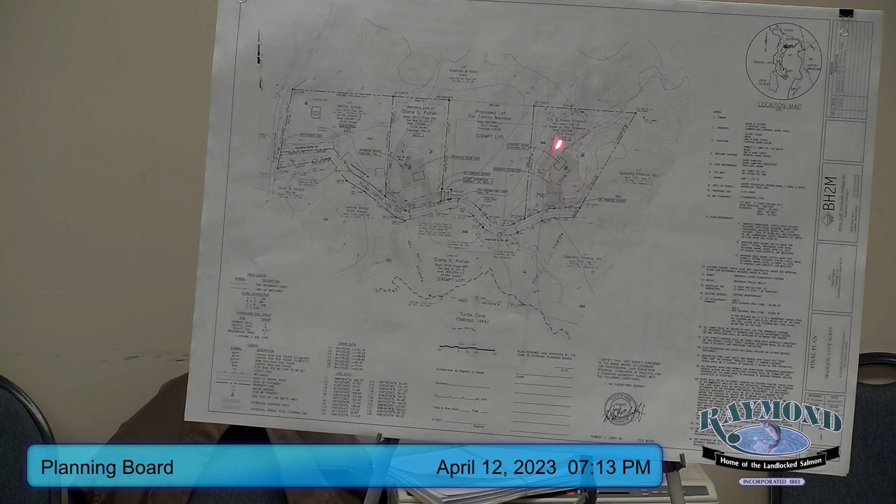Wetlands - we have wetlands mapped, and the vernal pool season, as Jim said, is coming up soon. We'll be proposing a vernal pool study for the two lots, and that'll be shown on the plan. What we've done with agreement of the town and planning board, on lot 2 there's a potential stream - any of these wetlands that are flow-through would not support a vernal pool. So we have one up here in the corner, and we asked the planning board if we could show a development concept as if this turns out to be a significant vernal pool.

So I have a 100-foot setback, which is required, with no disturbance, and then a 250-foot setback where you can disturb, I think it's 25%. I've shown those, though I didn't label the two lines - Jim said it would be nice if that told everybody what it was. The shaded areas represent what would be allowed for a building window, with 15% disturbance. For lot 1, I've outlined a potential building window and driveway location for these two lots, representing the maximum area that could be disturbed.

The only question we still have - that'll be available soon - is if this gets approved, we will assume the worst case, that it's a significant vernal pool, and our development will follow the Army Corps and DEP rules. But if it turns out there's no significant vernal pool, then the restrictions, other than the 100-foot setback, would go away. So we still have a 100-foot setback because it is a vernal pool, but the significant part would go away.

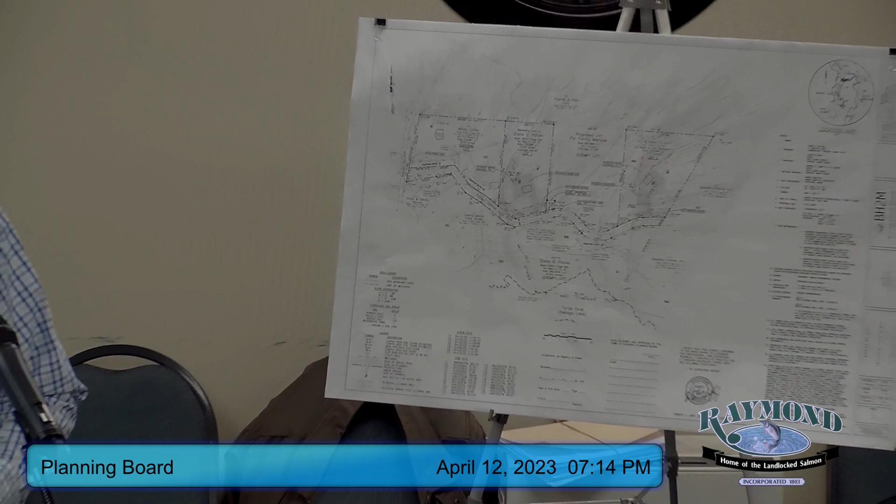We talked about streams - there were no streams on this parcel. 15%, we've got that spelled out. We have a phosphorus request and involvement with how to manage that. We're proposing a drip edge treatment around each house, which with our detail needs to be upgraded to have a liner in it, so Plan Note 25 talks about that. And on the 15% disturbance, Note 17 describes for Lot 1 and 2 that language, and of course the outline on the plan.

The phosphorus issue is a little unique here. We have an existing road, built and approved by DEP, handling all the stormwater issues, but we don't know what anyone's going to build - they're going to build a house and a driveway. So as far as trying to come up with an exact phosphorus calculation, we made a judgment of where they would build the driveways. In addition to the drip edge, we're proposing buffers - a stormwater buffer here and along the front - as a methodology to mitigate and minimize runoff from these lots. They're a little tough, you know, there's a lot of elevation out there, and we tried to work with the grades as water leaves a driveway or a house.

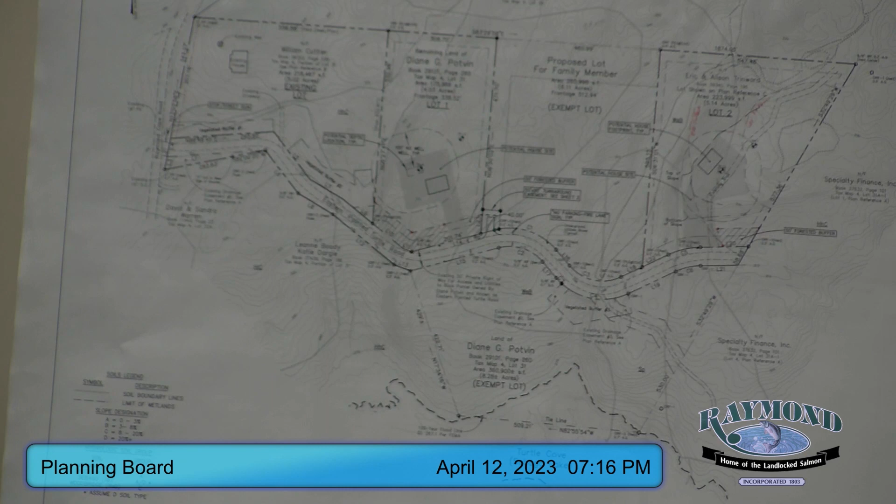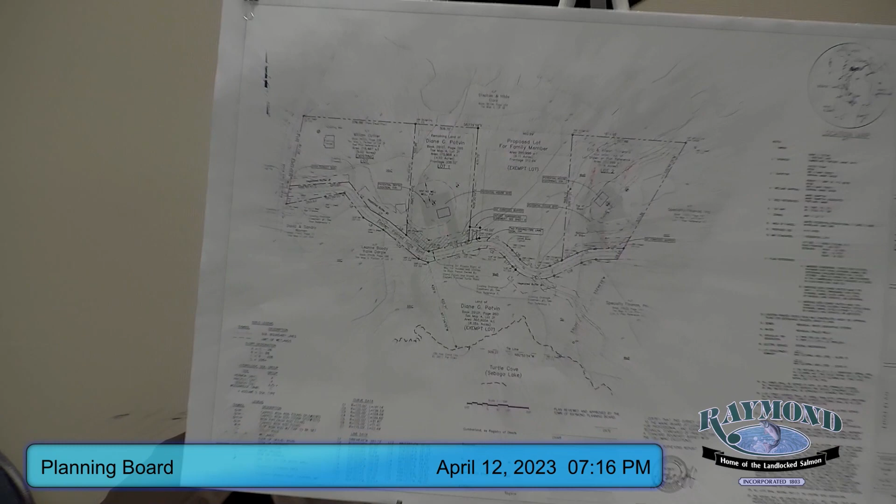That in conjunction with the limitation for clearing, right? Correct, yep. So those are notes 17 and 25 on the plan. Jim made a reference to a vegetative buffer. Number 3 is channelized, that's an existing buffer the DEP approved. That's all along Eastern, so I wasn't planning on touching it. It met their requirements, and as far as I know it's working really well.

So again, we talked about the buffers, the drip edge, proposed pins on the buffers. Yes, we will set them, but until they're established and approved by the planning board, I didn't want to pin the wrong thing. So there are smaller diameter pins for buffers, and they have a cap on them that says no disturb buffer zone. And we'll set those at separation distance around all of those buffers, assuming they get approved.

On the summary of planning board action in Jim's memo, Plan Note 24 about the road association, we should add that, or maybe add another note that all roads in this subdivision shall remain private, to be maintained by the developer, on and on and on. That's pretty standard language, and it applies now because it's an existing road served by others, and that should be extended to this plan here.

Okay, the lotting plan, I guess we could talk about that. There was a note on the final plan. Well, again, the road, private road meets the up to 10 lots sunset provision, Jim talks about when a project's approved, just to finish, so that note can be...

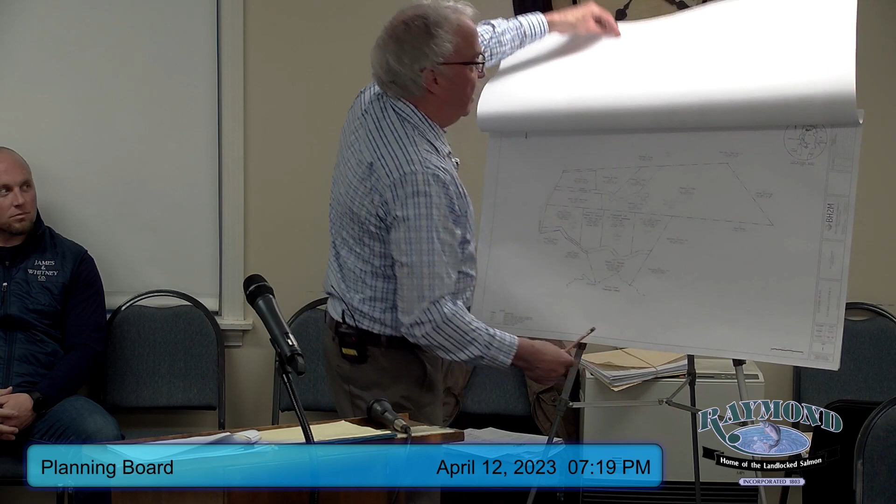That'd be great, okay, let me flip open the lotting plan. We can have a little discussion to see if we can get to a point of agreement. Here's the Potvin subdivision down on the bottom, showing the proposed lots and the lots that are going to be. Here's Turtle Cove here. Steve Clark subdivision up here, showing the division, and then the other one, I get his name wrong, it's Chase.

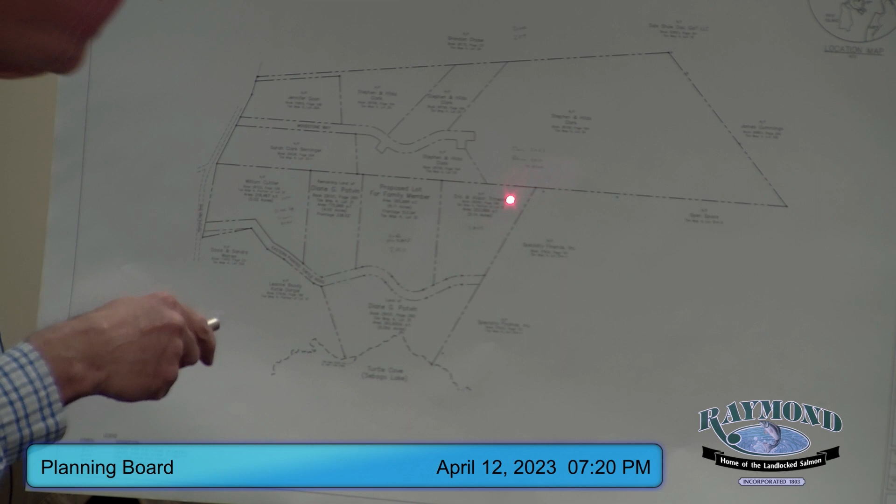Okay, there's a 37-acre lot up here that we didn't survey. There is a survey, and I believe that was done with Diane Potvin in 2014. This lot here, I gotta move up so I can read some of my notes here. Steve Clark, well, Diane Potvin, 41 acres, bought this in 2011. So if this is a lot, this is a lot, and this is a lot, this lot being over 40 acres is exempt from subdivision.

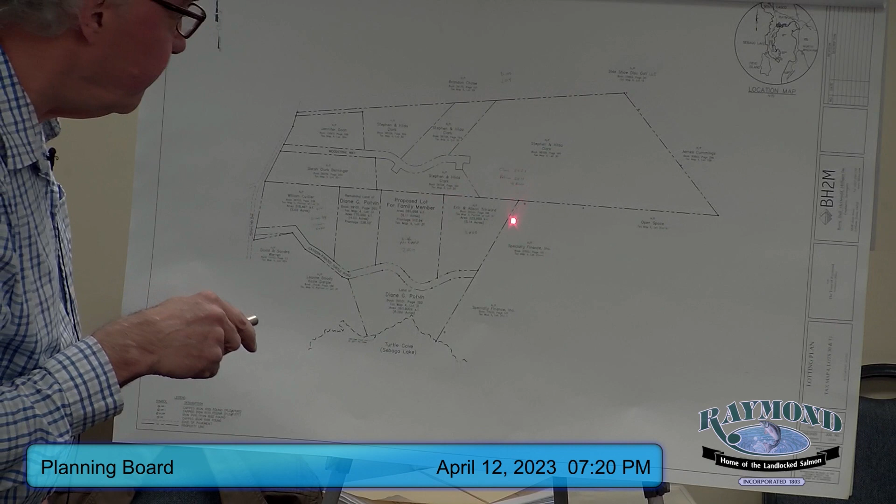So when this was divided, Chase being up here, this lot here, Diane Potvin bought it in 2011 and sold it to Steve Clark in 2021. And then this is Steve's proposal, so we show all the lots there. Nothing's happening on this lot, as far as I know. We have not done any survey on it, but it is identified as lot 29, lot 30, and lot 31.

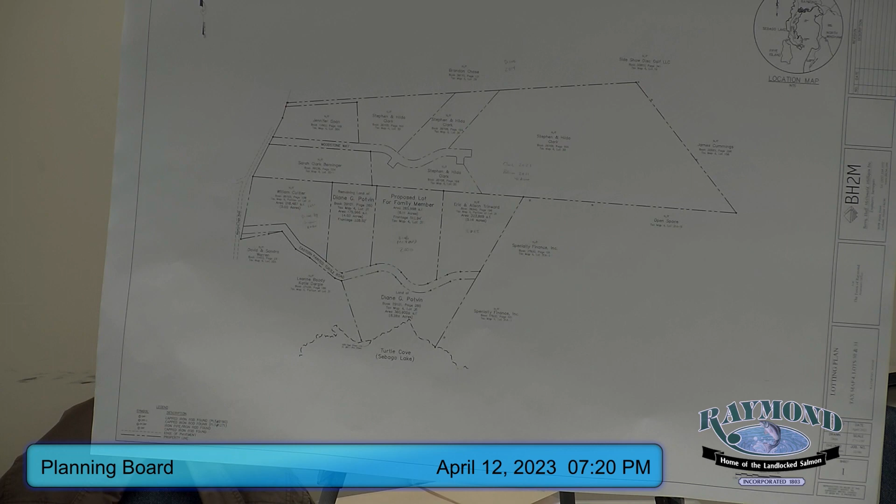So these lots were designated at some point in time in the town records, those lots and tax map numbers. Diane Potvin, and I believe at that time she and her husband bought this piece of land, and then she acquired full access and title to it by a divorce decree in 2020. And I guess she bought it in 2000, that's she and her ex-husband, they bought this in 2000. In 2020 the courts issued an order that she took control of this.

She sold this here in 2021 to Cutler. That is your first division out of this parcel. This was sold to Trinward in 2022, and that's one of our lots that we're trying to get approved out of this subdivision regulation. So that gives us an overall 3 lots, 29, 30, and 31, and what either is existing or what is being proposed, and hopefully that meets all, or will meet all the requirements that were assumed to be missing.

I was certainly confused, so if we could have some conversation on that and see what else is needed to allow this subdivision, and ultimately this one, to move forward. That's about what I have for bringing to the board.

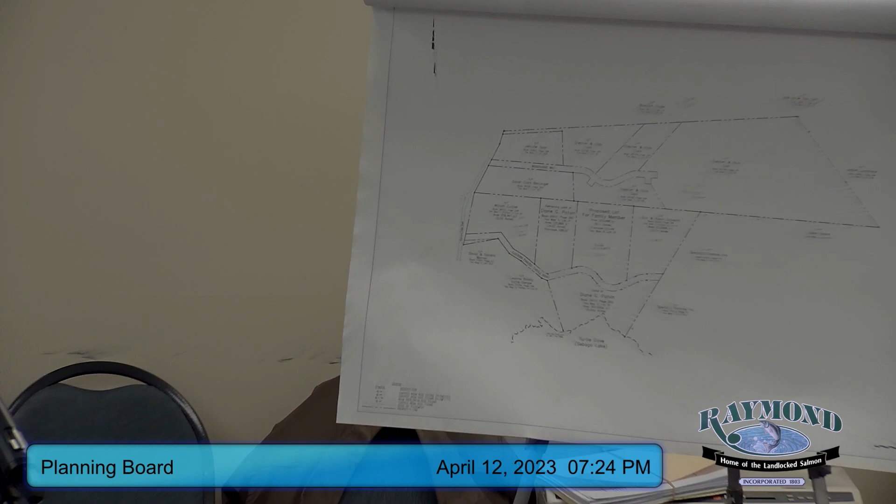Yeah, you'll see that in the Clark subdivision. And I think, Bob, too, that's an area we're starting to get into - you can chime in on it - we won't know until we see Mark Hampton's work, but I think there's a few vernal pools out there that are going to further restrict that as well.

And, you know, one of the rule changes that's coming forth - not that it affects the board, but it will affect many applicants as far as cost goes - is the Army Corps is going to be changing their compensation thresholds. So anything over 5,000 square feet of wetland fill will require compensation, probably starting sometime in May

or June. I haven't heard that yet. Yeah, it's 15,000 now, where they're going to drop it to 5. Wow. That's through the Army Corps, so that's going to have some financial burden on people who want to fill wetlands. So between the vernal pools and the wetlands, I think Bill has a reasonable answer to that question - it's just not going to be feasible to connect.

Okay Jim, how does that work? Is that money that comes back? Yeah, it's money, and right now I think the rate in Cumberland County is almost $6 a square foot. So if you fill 5,000 square feet, you're writing a check to Army Corps for $30,000. And if it's 4,999, it's zero. You go to 5,000, it's 30,000, or thereabouts.

So, was there some discussion - I think I read somewhere - about concern over the family plot, that we needed something special? Yeah, and I think Alex, you can shed some light on that one, because I think that's a discussion you might have had with Jim Kazafikis, if I remember correctly.

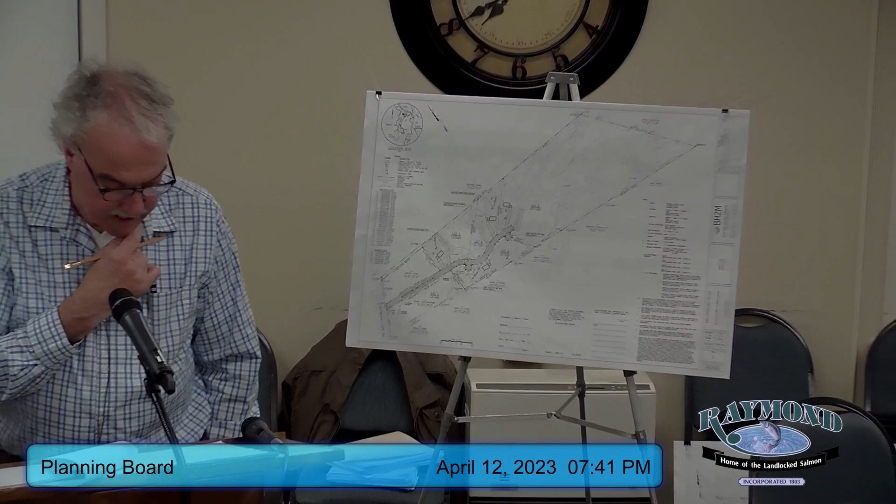Again, Jim's very thorough, got all his permits, his memos. Stephen and Hilda Clark are the applicants looking for preliminary approval of the Woodstone subdivision, so we can move forward with DEP and then come back for final approval. In my response letter back to Alex, March 2nd, I responded to comments, and then like I did on the last one, a summary for planning board action.

Things that we're missing: HHE-200 forms are submitted. Erosion control will be managed on the 5 lots utilizing standard BMPs with erosion control, silt fence, etc. Fire department's response has been accepted. Applicant is preparing a homeowners association and a road association responsibility agreement — those are in the works, and we will certainly have those before the next meeting.

The entire parcel now has a wetland mapping completed. Early on in the process, we had only gone up to a 4-lot subdivision, and then everybody — town and the applicant — said let's see what the whole site has for characteristics. So the entire site has had its topography and wetlands mapped. And that site characteristic would not really allow a road to go any further than what we have proposed.

We do have the turnarounds meeting the fire chief's standards.

Again, the lotting plan came up early on. If we need to go back to that, a plan note shall be added to the final plan outlining the timeline of the expiration: start within 2 years, finish in 4.

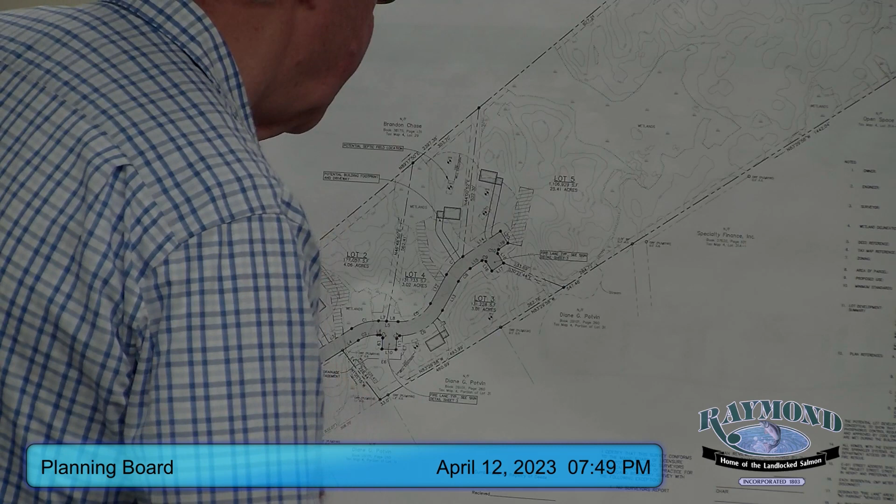Is there a stream here somewhere? There's one, I think, that was discussed that crosses right through Lot 2. I think it's right here, sir. It really starts right on our lot and comes down through here, so there's no impact. I think the stream starts at a designation here, comes down through, so any setback, we can show this little setback corner here, but it doesn't impact anything. It's more on the neighboring property.

Oh, that's right, too. The one on Lot 2 was a wetland. It wasn't a stream, correct? Correct. Yep, we thought it was a wet stream. That's right, yeah, it was not a stream. Okay.

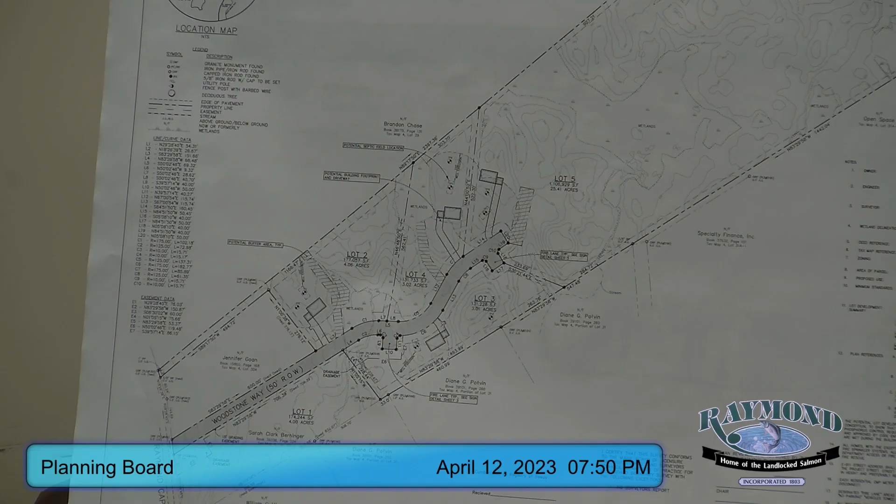And have you looked at this in relationship? I know there's a lot of overlap to the shoreland zoning requirements. Does it seem to be anything that we need to discuss tonight? I think the biggest one was the road slope, but I think most of the items have been addressed. I think all the well exclusion and those types of things come out of that shoreland zoning requirement.

Alex, too, the septic, you'll have to take a look at the septic, right? Because the septic designs require a higher flow rate, daily flow rate, right? Because it's in the shoreland zone, or do we just restrict that? No, that only applies to houses within 200 feet of a Great Pond. 250? Right, it's 200. Yeah, just 200. So you're all set on those, thank you. Okay, yeah, good to know.

And Mr. Chair, this is before you tonight as preliminary. I know they have some items to clean up, but I don't think you're going to see any substantive changes to the plan with any of these items they need to clean up. So again, it's up to the board. I think we would offer that it makes some sense to grant preliminary so they can move forward with their DEP permits, because we don't want to make any wholesale changes to the plan at this point, since it'll impact the DEP permit. And I don't see anything in the road design that's going to change anything.

The 10%, you have a pending consent agreement with the town council, town select board. Alex, what action do they need to do to finalize that? I think at this point, the town attorney was going to reach out to Diane Potvin's attorney to discuss the consent agreement. And I know they've seen it already, but I think the next step would be to make sure that they are good with that. And I'm not sure if it will be signed by Potvin and Clark or how that's going to work, but essentially they need to sign, we need to sign, and then that's good to go.

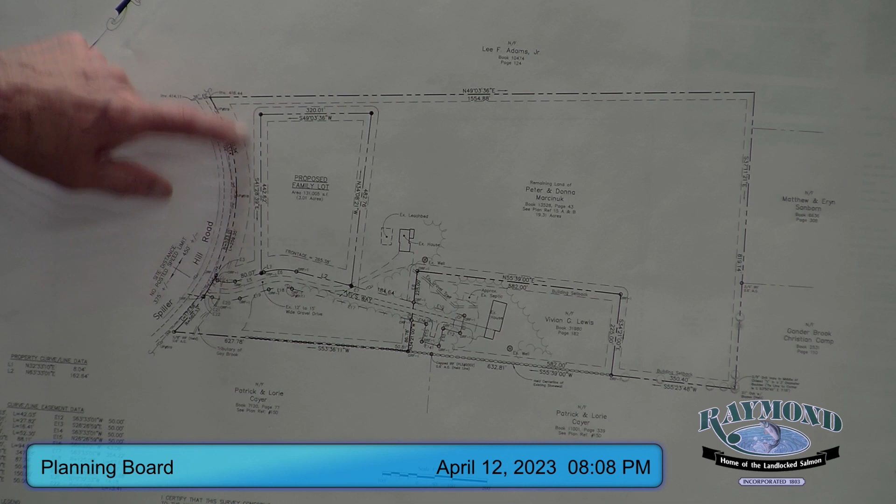Can I ask, with the stream going down that little area between Spiller Hill Road and the proposed lot, would it ever be possible to use that? I'm not even sure that we would be concerned about it, but I'm just wondering if that would ever be used as frontage, or could ever be used for frontage for a back lot, creating kind of a funky lot. Well, they have a back lot now, so Alex, you can help us out here, but I think once you have one back lot on the property, I don't think you can get a second back lot. So I think they've tapped out that option, unless they were to convert this to a higher level private road, then they might have that opportunity.

The other thing would be, if they did that, with a DEP permit, avoidance and minimization might be an issue where you have two crossings on the same property. If this were upgraded to a private road, DEP would prefer that rather than having two crossings. That's a ways down the road, but good question, or maybe never.

Wayne, did you have anything else of concern? Sorry, talking without the mic. Looking at the map, it talked about there's areas of the road that are only 12 feet wide. Is that correct? That's correct, 12 to 15 feet wide is what the existing conditions show.

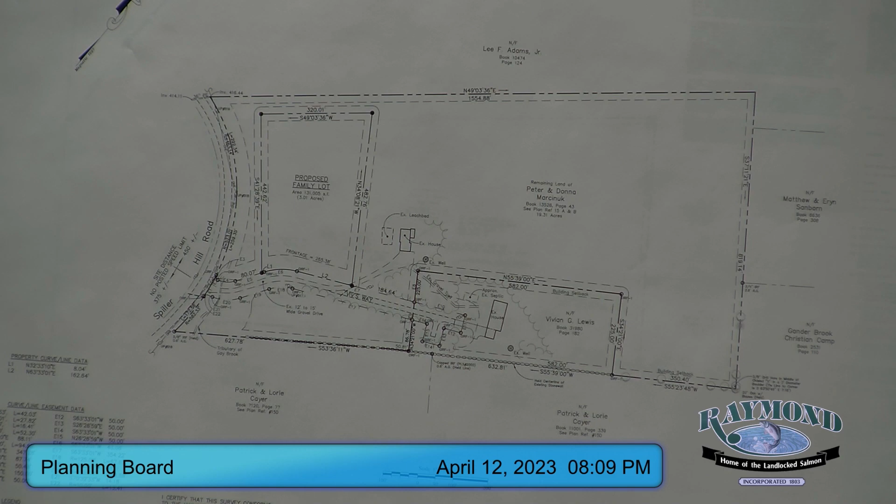Okay, now when we get to 12 feet, that's starting to be a concern. And then the only other thing would be, we've got to take care of E911 addressing, as we know. And for fire protection water supply, at this point it doesn't make sense to have somebody put in a cistern, but in lieu of that, we usually look for a sprinkler system in the house, where it's the new lot that comes in, the subdivision ordinance requires that.

The other thing, and I did have in the memo, the board may want to request a waiver for the open space. I know this is part of a larger subdivision, but I don't think it makes sense in this particular case - it's a family compound, I don't see where you'd need to retain open space. I think that's something the board could consider to waive.

We haven't typically done that on amended subdivisions in the past. Why do you think we would need to do that, Jim? Waive the open space? Without looking at the whole overall subdivision, the overall subdivision may have retained open space, I don't know. But usually on these amended subdivisions for one lot, we haven't been requiring the open space of 10%.